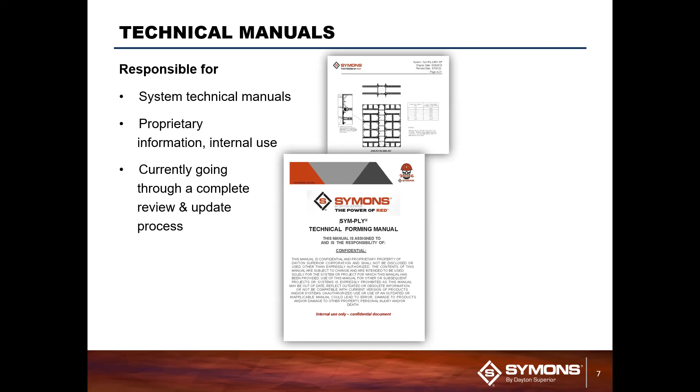These are going to have information such as standard and non-standard applications. You're going to have nomenclature in there, but then they get into the more technical details of the product lines: dimensions, capacities, factors, safety criteria, and so forth. So again, these are internal use only, but it's something that our group maintains. And right now, this is the new look of our technical manuals. There's 4 that have been reviewed and completed, with several more to go.

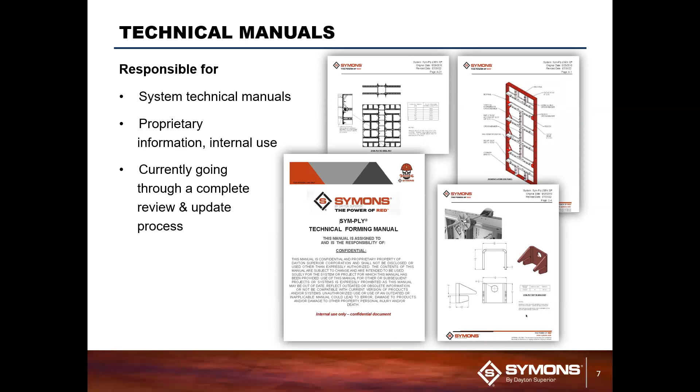ID, safety, and assembly drawings. So these are going to be part of the completed package that our team provides to our customers for our solutions. We have several standard templates that'll be at the front of a drawing package. You know, ID sheets, safety sheets, typical assembly ISOs.

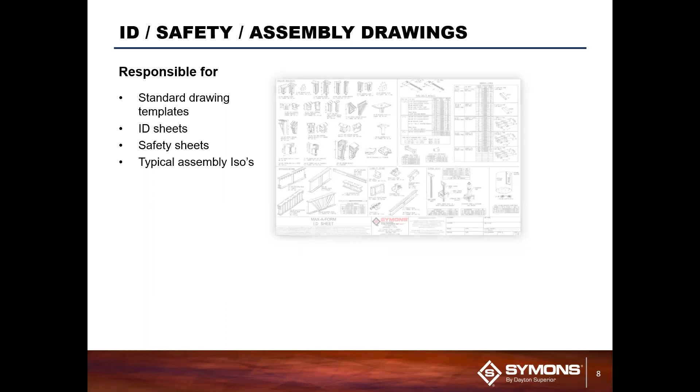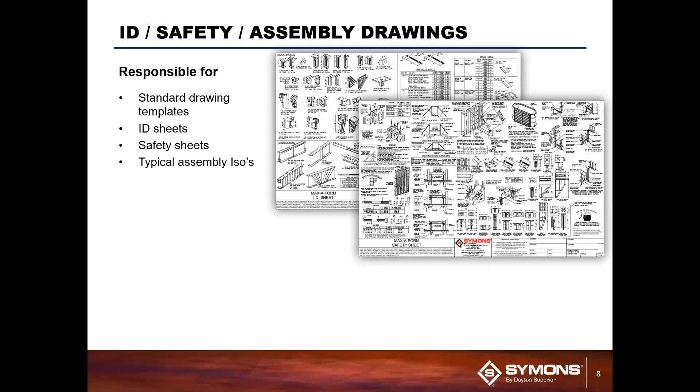So you can see here, this is a look of an identification or an ID sheet. So that's going to have an ISO rendering of each product. It's going to have a product code, description, weight of each one of those products. The safety sheet may look somewhat similar depending on what the system is, but this is going to go into a little bit more depth as far as the capacities, such as taper tie capacities or support bracket capacities, factors of safety, you know, critical application uses for those types of products.

And then finally, we've got some very more specific ISOs that we provide at the front end, depending on what the system is. You can see there on the bottom left, this is for our Max-A-Form STS system, proper application of the girder bolts in the corners, very critical to the use of the system, scaffold brackets, walkway brackets, heavy duty lift bracket attachments. So it's going to go into detail with a nice ISO rendering there at the front end of a drawing package.

New product development. So Symons has a very long and proud history as far as innovation in the forming industry, starting all the way back in 1918 with Arthur Symons coming up with the ever square column clamp patent. Then he had wood ply in 1945, leading to the steel ply patent in 1955. So there's a long history there, and you'll see some more here in a minute of where we've been since then.

But this team gets involved in the design of that, as well as producing the production drawings for those products. We do technical review as well and support, whether we're doing the actual design with our team or another team here in Miamisburg is doing it. We will provide the support to technically review those. And then you just saw several of the documents that we also provide support for, such as the tech manuals, the application guides, ID, safety sheets, tech data sheets, such as that.

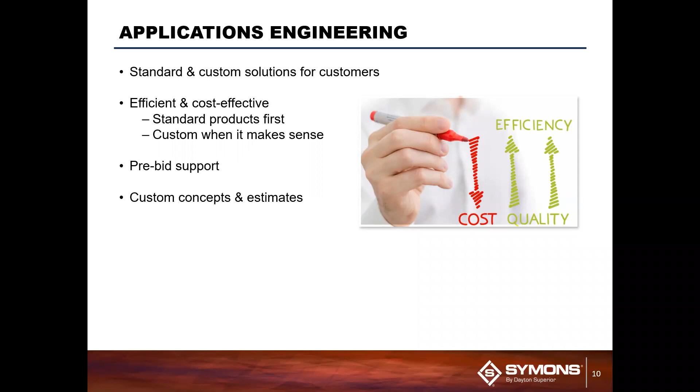We provide pre-bid support. So this is anything from a back of the napkin scratch all the way through the finished project to the bids that we send out to the customers. That could be a full-fledged drawing package or just a quick review of that sketch on the back of a napkin. Custom concepts, which we've talked about, working with our procurement and our vendors to come up with those estimates.

So at a 10,000 foot level, and really in very few bullets, this is what our key is for our group, right? Those projects come in through our sales team. Our group reviews those, what that project looks like and evaluates it. We do our best to try and review what has been submitted. Do we have everything we need to move forward? Do we have all the questions that we need answered?

And we go back and forth with our sales group and our customer to make sure we're there, so that when we get to the work, we can work as efficiently as we possibly can. We'll schedule that workload. We look local first, so if the job comes out into the west, out into Los Angeles, we'll use our group in Rubidoux. But we do have the ability to transfer that work all across the country to our other groups. So depending on what the workload is, what the demand is, we can shift those to our different groups.

We'll go through our design process and reviews with our customer and our sales teams, and we'll submit that final package. So there's a lot of work involved in those few bullets, but that in a nutshell, 10,000 foot level, is how a project flows through our group.

We do have an internal database system that we use for tracking and logging each one of our projects. We use this to take a look at our backlog, take a look at our productivity. How efficient are we doing our designs by product line? So it's a great archive as well to go in there and look at, have we done this before? We can go in there and see what other designs we have done to tackle a project.

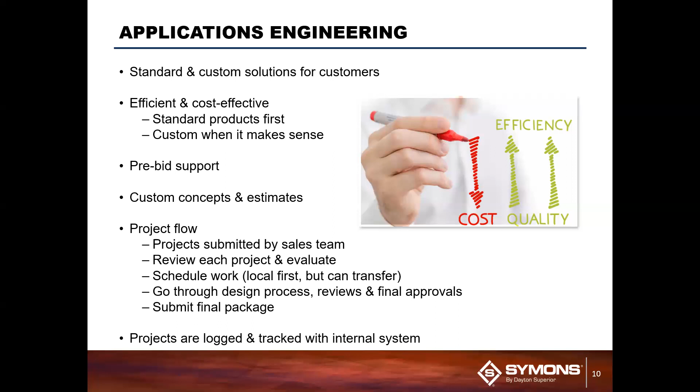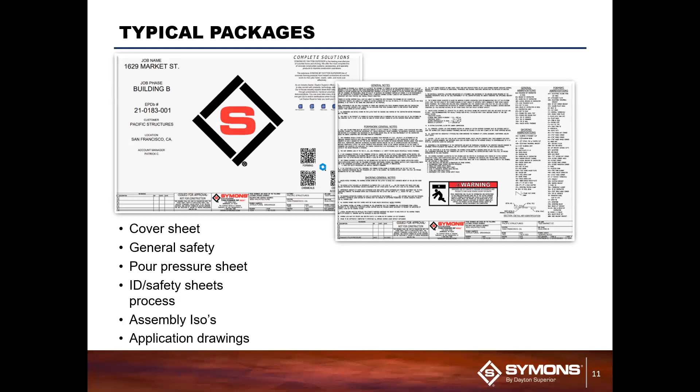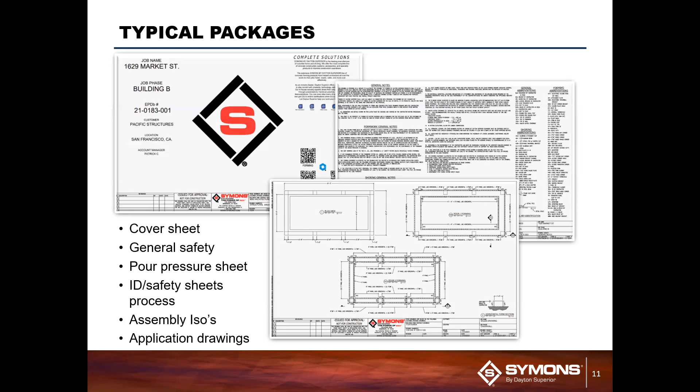You're going to have the ID safety sheets that we talked about and you saw just a little bit ago. You're going to have the assembly ISOs if they relate to this project that we looked at from Maxiform STS. And then you're going to get into the actual application drawings of how our products are being applied to that structure. So in this case, typically you're going to have a drawing that shows the concrete outline, concrete dimensions. Again, this is something we just verify with the customer. Hey, is this what we're forming? Is this what we're going to be providing a solution for? And you've got some general plan views there of that structure.

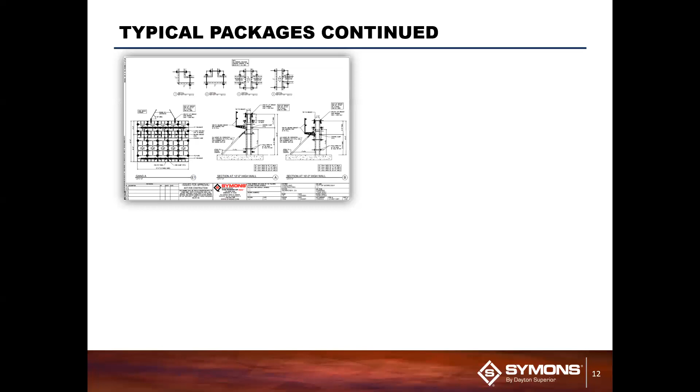Then depending on what it is, obviously we get into elevations, sections, general details that are a little bit out of the norm. So we've got some corners there, some T-intersections, a double intersection there that we're detailing out in that one. And then depending, again, on what that structure is, in this case, this is a hammerhead cap. You can see an elevation, plan view, and some key sections across that cap. Another hammerhead cap on the bottom left. A little bit more detail on that elevation, depending on what's required. On the right there is the round column forms and a soldier walkway platform at the top.

The key thing here is if you look at all of these drawings, all of them are a little bit different in what the structure is, what the systems we're using. The vast majority of what you see here is all standard. So that follows our first protocol. We want to be with our standard equipment as much as we possibly can. There's definitely some custom involved here, but it's where it's required only.

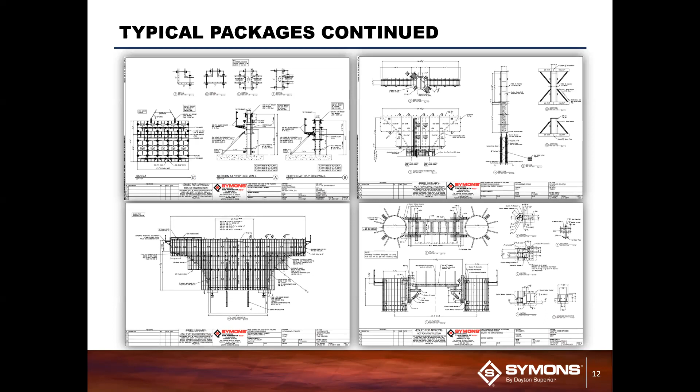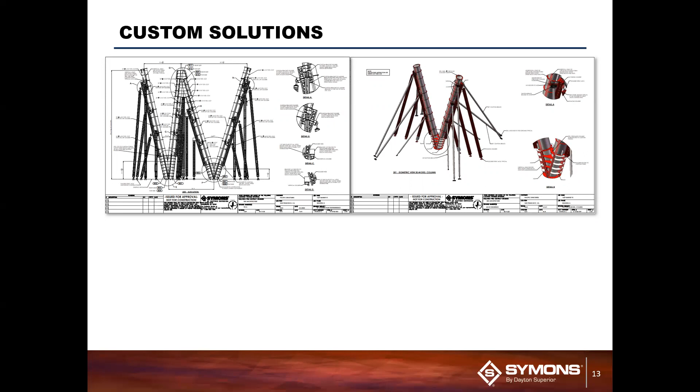As we talk about custom, this is where it gets fun. This is where it gets challenging, and we like to take those challenges on. This is a round column structure here in a V and a W shape. So again, from a cost standpoint, we take a look at the cost effectiveness here for the customer and the best solution. A lot of this is standard. If you look at the bottom center there, all that gray is a standard round column form.

The custom comes into play when those two come together at the bottom or the top. You can see a lot of soldier there for standard bracing needs. There's some custom there for the brackets that attach it. So a lot of standard here combined with our custom. So it looks pretty simple, but there's a lot of work involved in what this design ended up being. A lot of back and forth with the customer, but that's what we're here for. We're here to provide the best solution for that customer. A lot of times you could look at this and a customer would want it all custom. If that's the preference, that's what we can do as well. In this case, it made sense to do a combination.

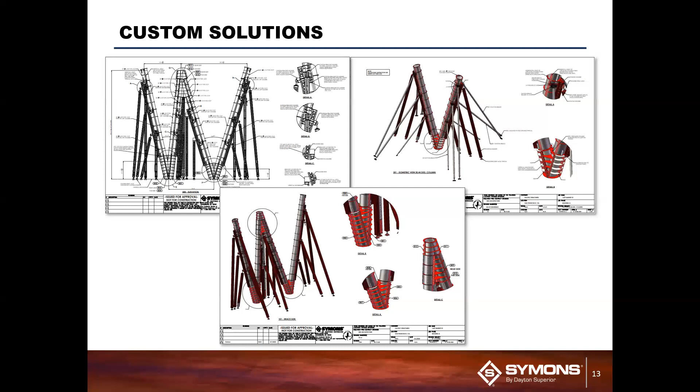A little bit more of what we would call full custom. So in this case, this is a digester structure, the very bottom of a digester structure. So it goes from a 45-degree angle there all the way at the bottom of about 10-foot diameter and expands out at a 45-degree radius. This is almost full custom. You can see some standard parts of soldier in there. And then in the drawing in the center bottom there, you can see some standard shoring for us as well. But as you look at the formwork, this is full custom design of a biosolid structure.

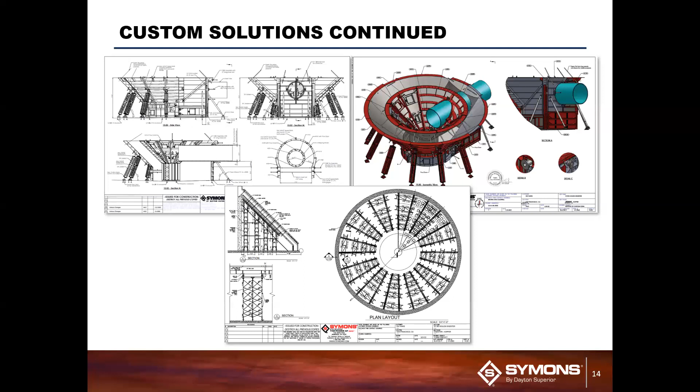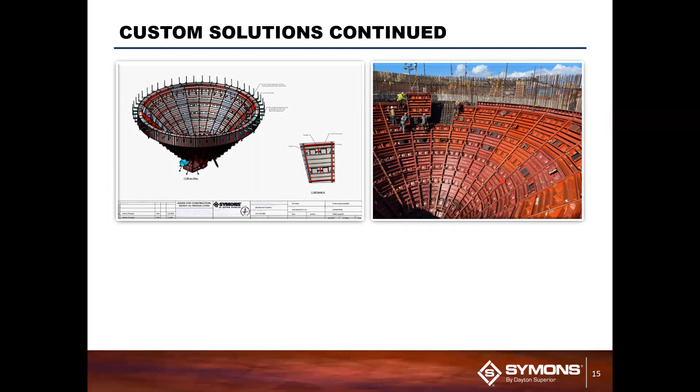So that very bottom portion that you just saw, if you look at the top left, is clear down at the bottom. You can see a tube coming out of there. That's that section. All the rest of it, you can see a picture of the finished product there of the panels. That is all custom. A lot of work goes into this, but again, a great challenge. And what's fun is you get to see the finished product at the end.

This is one of 5 digesters that are being produced right now that is ongoing. You know, from bids, those back of the napkin scratches, all the way through to getting this design and products out, we're talking about 2 years. This is a lot of bid process, a lot of design work, working with the customer, finding the best solution, and providing that out to the customer.

And that's what makes this industry so exciting to be an engineer in. That massive and vast variety of work that comes in. You could be doing a house foundation at the beginning of the day and end up working on something like this at the end of the day. So that's what's exciting about this, and that's what we really have a lot of passion for here at Symons.

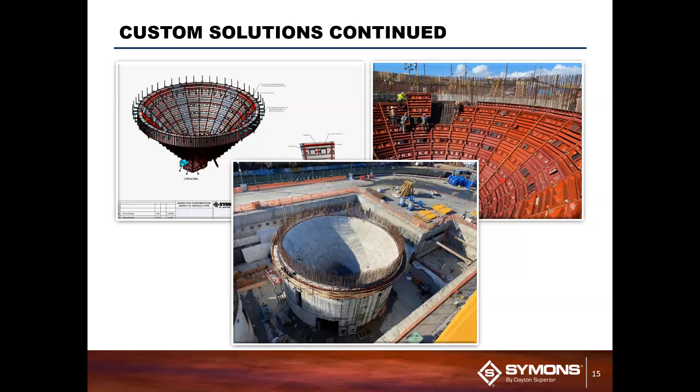All right, thanks, Tyler. I actually learned quite a bit on there. I love that you were referencing our soldier system and how it was not customized, but it was used with the customization. That was beneficial to me, so I hope people on the phone saw that as well.